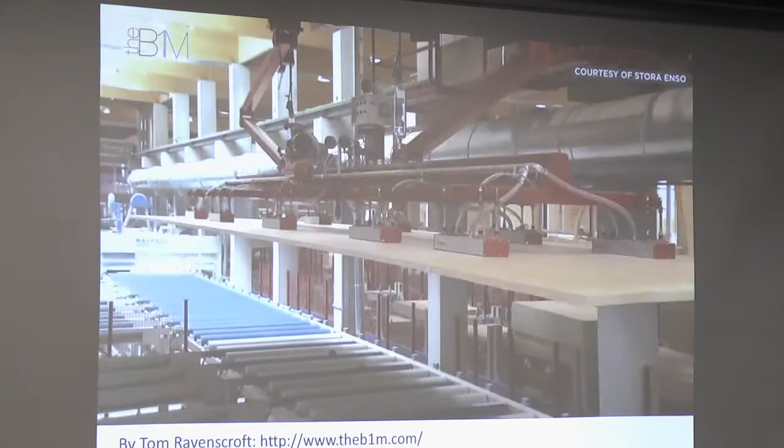Often referred to as super plywood, the material is constructed in a controlled factory environment from sustainably sourced timber. CLT is manufactured from spruce, although Scots pine, larch and Douglas fir can also be used. Once at the factory, the timber is planed and then kiln dried to reduce moisture content.

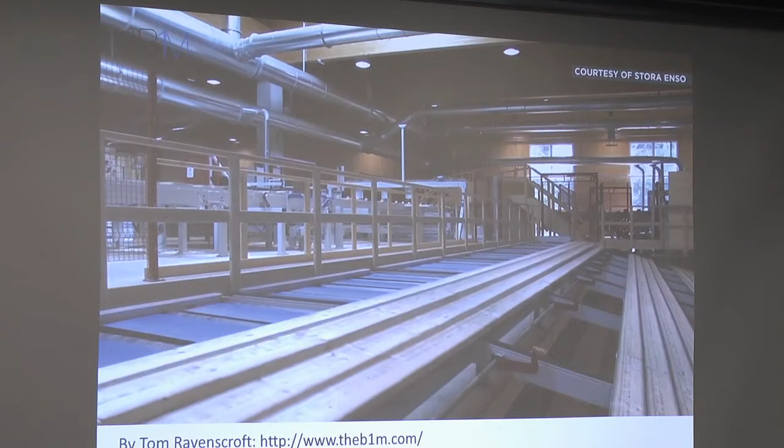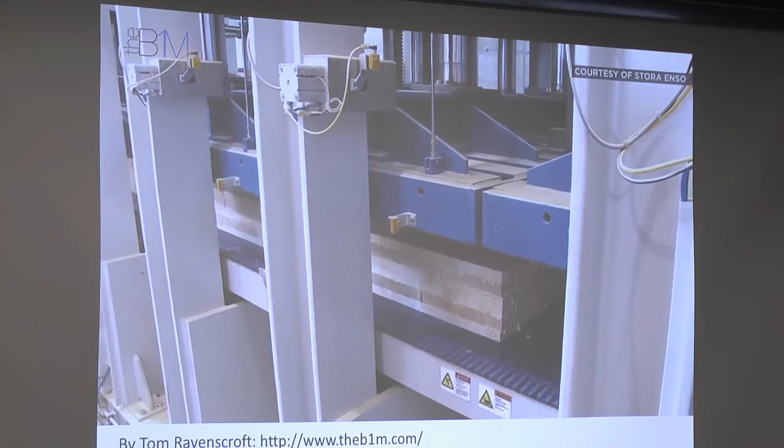The conditioned timber is then stacked into layers known as lamellas on top of one another. Each layer is placed at a 90-degree angle to the one beneath. These layers are then glued using a non-toxic adhesive and hydraulically pressed together to create the high-strength structural panels.

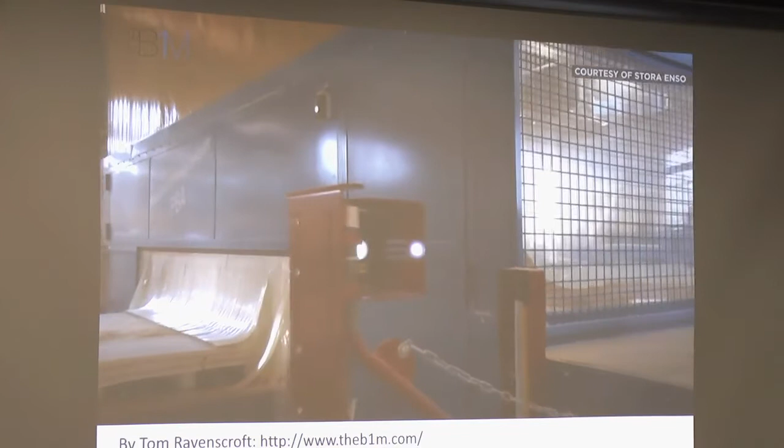Individual panels can in theory be any size. However, their width is limited by the size of the manufacturing machinery, which is usually around 11 feet or 3.5 metres wide. The length of the panel is only dictated by how it will be transported to site. While 45 feet or 13.5 metre lengths are typical for practical purposes, panels of up to 75 feet or 22 metres have been produced. Using state-of-the-art computer numerically controlled, or CNC, joinery machines, almost any shape of panel can be produced, meaning that door and window openings can be pre-cut in the factory. These off-site manufactured panels are then ready to be delivered to site.

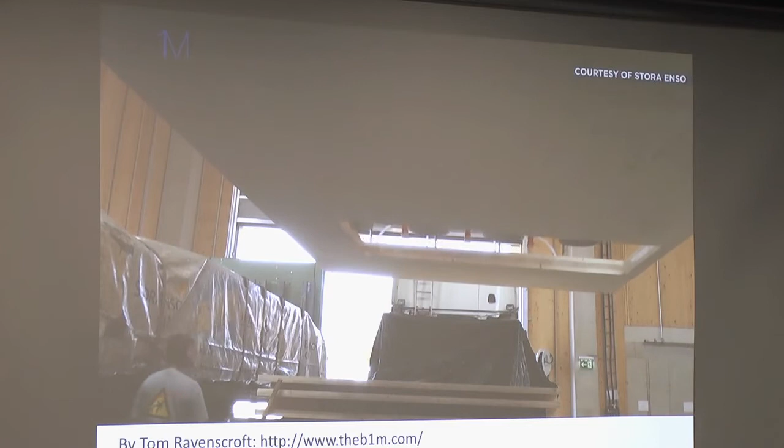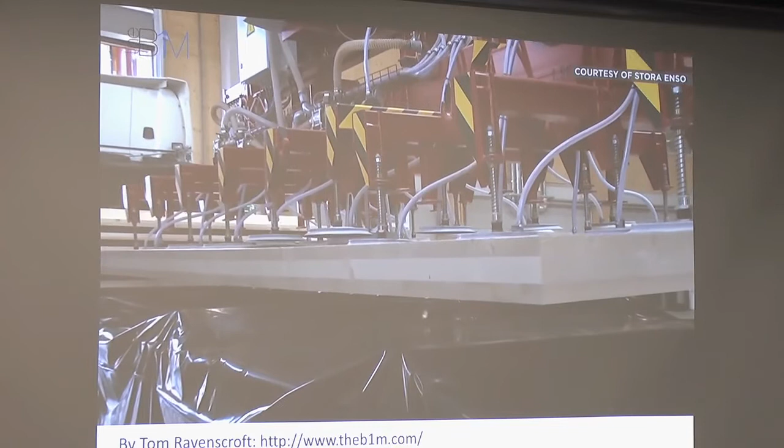Fabrication is currently limited to only a handful of factories in mainly alpine countries, such as Stora Enso's in Austria. While this may require the panels to be transported to site by road, the embodied energy added to the project is far outweighed by the carbon savings. Proponents of CLT claim that producing timber building components consumes only 50% of the energy required to produce concrete, and a mere 1% of that needed to produce steel.

Prefabricated panels can be delivered to site as they're needed, making this construction method ideal for schemes with limited on-site storage capacity. They are then lifted into place using pre-installed lifting straps and rapidly assembled, greatly reducing construction time and therefore cost. As the timber used is kiln dried, CLT should not shrink or warp when on site.

However, like most timber elements, CLT must be placed above the damp-proof level and will need protection when used on the external facade. CLT construction can also reduce the self-weight of a structure compared to concrete, potentially reducing groundwork costs. The construction process is also cleaner than traditional methods, with greatly reduced levels of dust. It is also quieter, a distinct advantage for projects built in urban areas.

While there are numerous benefits to CLT, some people are fearful of living or working in timber buildings. Some believe these structures have an inherent fire risk, particularly when rising to 10, 20 or 30 stories tall. Unlike unprotected steel, CLT can remain structurally stable when subjected to high temperatures. When exposed to fire, the outer layer of timber chars and forms a layer around the structural core, which can retain its load bearing capacity.

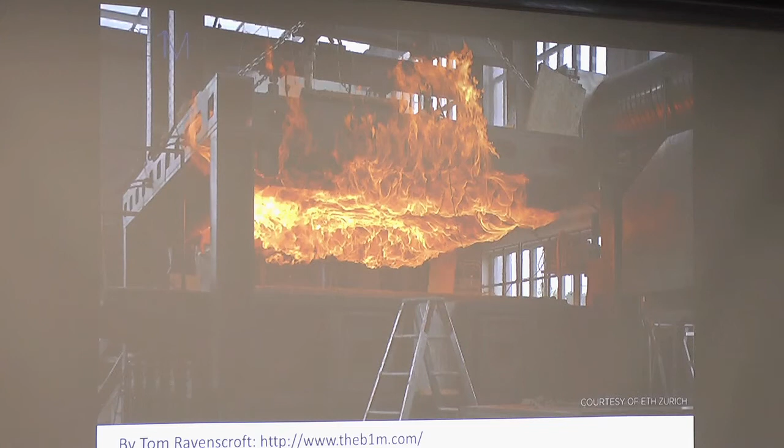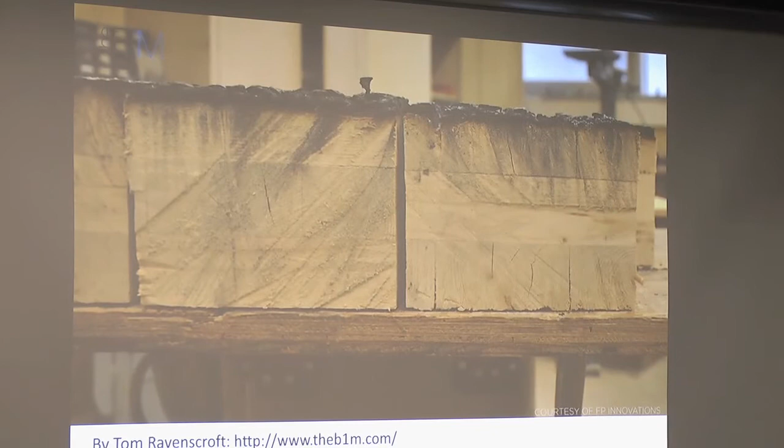CLT's inherent fire resistance allows it to comply with fire resistance classes, withstanding blazes for between 30 and 120 minutes, depending on its engineering and formation.

CLT uptake and use was initially driven by the material's sustainable credentials. However, in recent times, a resurgent construction market that is placing pressure on traditional materials, along with increased awareness, has bolstered adoption. While early CLT buildings were predominantly small, low-rise structures, the material is increasingly being considered for taller schemes. Since architect Waugh Thistleton built the first timber skyscraper, or plyscraper, in 2009, tall timber buildings have been planned around the world. In the past 5 years, towers of 30 metres, constructed from CLT, have risen in Australia, America and Europe.

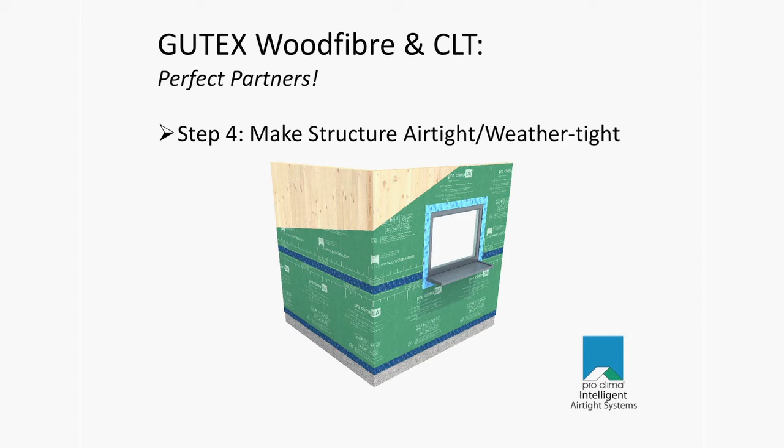This is one of Pro Clima's membranes, called DA. It's weather resistant, but it's also airtight and gives a degree of vapor control as well. That's wrapped around the CLT in this case, and then it's taped at the joints with a tape called Tescon Vana. So if the membrane wasn't used, it would simply be a matter of using a high performance tape on the butt joint of the CLT, such as a Tescon Vana tape you'll see later on.

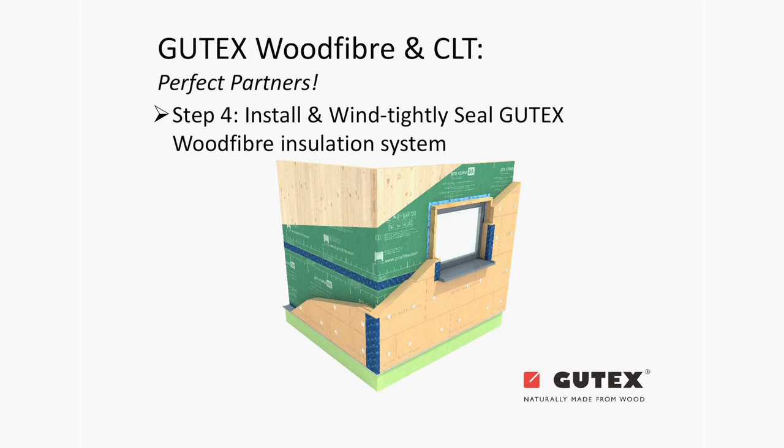Following that, the insulation is fitted. Here we see a single ply of Gutex multi-therm, for example. You can see this on the displays outside and in here as well. This is initially fitted with some temporary screws, and then the battens are fitted on the outside, followed by

the external cladding, which is timber clad or cement board or whatever that may be. You'll notice with the Gutex boards, they're tongue and grooved, interlocking, and watertight. The external Gutex boards are impregnated, so they're inherently very water resistant. The weak point would be at the butt joint of the board, wherever it corners or around windows. So at butt joints, it's important to prime the surface and then use a suitable high performance tape, such as the Tescon Vana we see here.

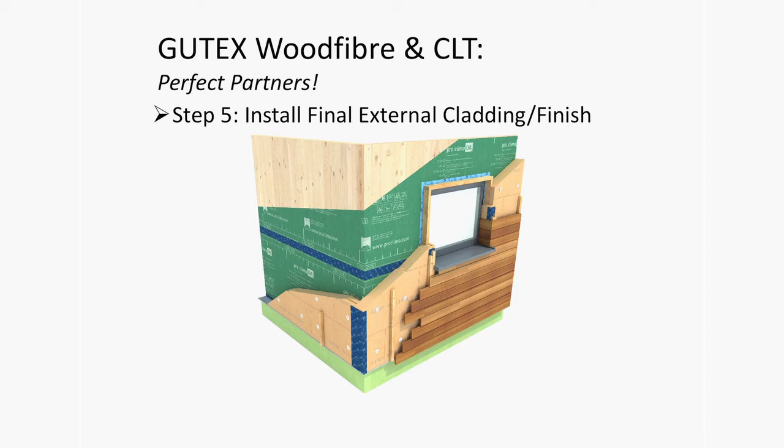Of course, you can apply a breather membrane on the outside of the wood fibre board for additional robustness and belt and braces. Or perhaps if you had an open jointed cladding and you wish to visually see a black finish between the open joint, you can use a membrane for that application. ProClima manufacture one called Solitex Fronta Quattro, which is a UV stable membrane, black in colour, so that when you have the open joint, you're not going to get degradation due to UV light.

In terms of projects, this is one of the first projects we've worked on involving CLT. The very first project was with Urban Architecture. I'm delighted to see Steve here from Urban Architecture, a project in Flinwell. But this project, the Woodland Trust headquarters in Grantham, we worked on with Will. It was the first CLT project we worked with Will on, and it's a BREEAM excellent building.

The walls utilised approximately 282 millimetres of Gutex in some locations. It's the first time I learned the term 'the bookend wall', and it stuck with me since, because that's where the thickest piece of Gutex was used. It was generally 182 millimetres, but there was the bookend wall that went up to 282 millimetres. So technically we had to come up with details to address the increased thickness and the fixation onto that point. So it stuck with me.

The building is very impressive. It has achieved a U value of 0.11, and it used a lot of the tapes and seals I referred to earlier on. Here we see it in actual application, where a combination of three Gutex boards were used. A board called Thermosafe Homogen, which is a relatively soft wood fibre board but very compressive resistant, and it helps you build up your bulk depth of insulation. And then that's covered by one of the impregnated Gutex boards, which Reiner will describe later on, called Gutex Ultratherm.

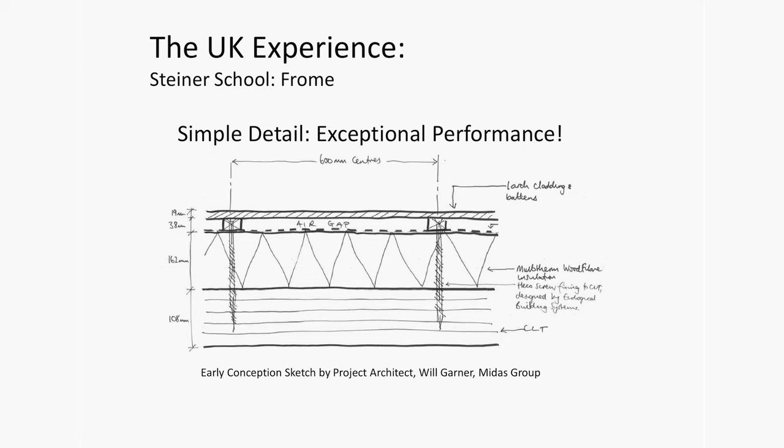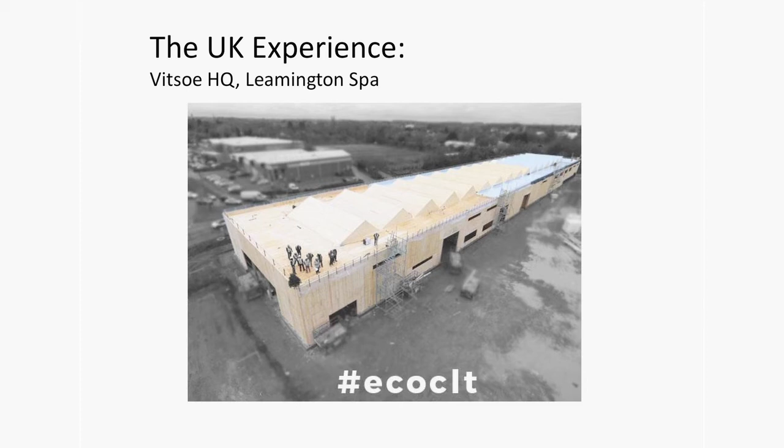This project is the Vitsoe headquarters, and Vitsoe manufacture bespoke furniture in Leamington Spa. This is on site at the moment.

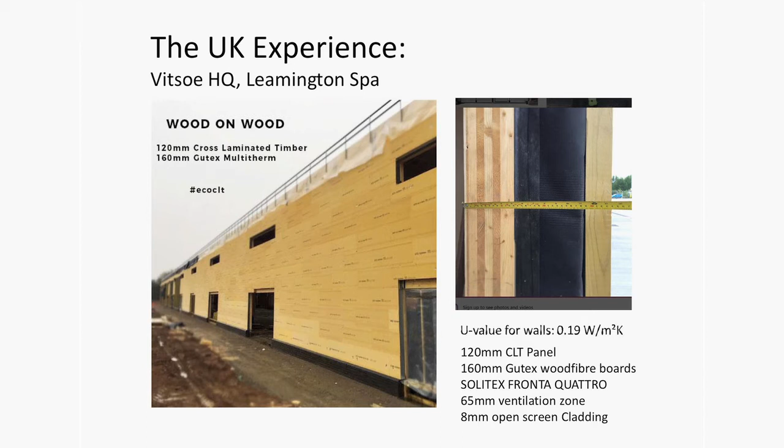It's a 120mm cross laminated timber wall with 160mm Gutex Multitherm in one single ply. Here we see it fastened to the wall temporarily before the battens are applied. The U value attained was 0.19 with 160mm of Multitherm on the outside. We had a 65mm thick batten followed by an external open joint cladding system.

In this project, for the CLT they didn't use an exterior membrane, they just taped the joints with a tape called Tescon Vana. So that was the airtightness layer, the CLT itself. It wasn't aiming, as far as I'm aware, for passive house levels of performance, and it hasn't been tested yet for airtightness either.

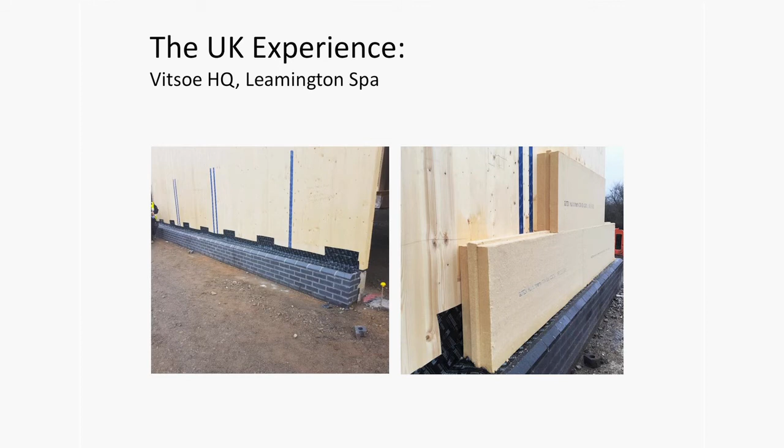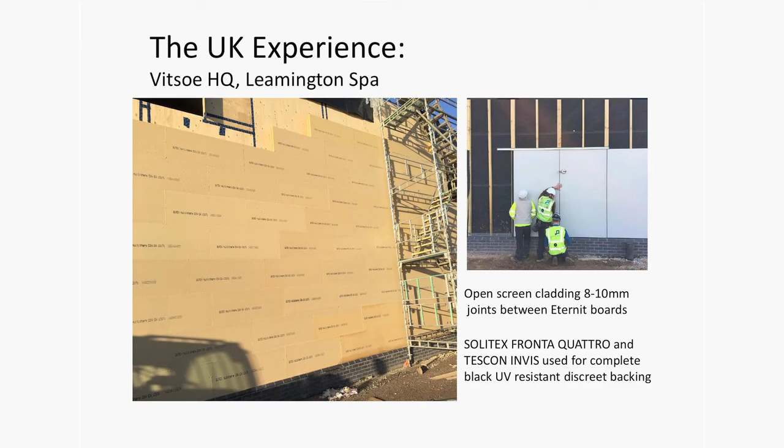And there you see it on site with the boards ready to be fitted. On the outside of this we'll have the Solitex Fronta Quattro membrane installed with the open jointed cladding for UV stability. This project is a private dwelling, and it'll be presented later on by Tectonics Architects.

It's a very interesting project in that it's a certified passive house, but it used quite a considerable depth of Gutex on the outside. It used 320mm of Gutex, which required quite long screws, and that's why I brought this with me, the real reason, because these half meter long Heco screws were used.

At the time I ran through the screw calculations for fixings, and I got to speak with Paul from Heco. He's very helpful in their technical office, and just to double check that it was actually okay. As an engineer I didn't doubt myself, but I wanted to speak to another engineer and run through the calculations to double check. So I can hand that around - that's the Heco screw.

This project attained 0.29 air changes per hour at 50 Pascal, and for a passive house you must get less than 0.6 air changes per hour at 50 Pascal, so it came well within that requirement, and the U value on the wall was 0.1.

Here we see the CLT with 3 layers of Gutex and 2 layers of Gutex Thermosafe Homogen, followed by a board called Gutex Ultratherm on the outside, a batten, and then a half meter screw going back to the CLT.

That's one of the benefits with CLT when you're using such long screws, because an issue we often come across is on a timber frame, you're looking for your 400 or 600 center stud that may be 44mm wide, and trying to get through that depth of insulation and hit that stud can be chancy enough. With CLT you've got a full uniform substrate, so you're never going to miss the point of connection, and there's no risk of splitting wood or timber. So it's really, really good.

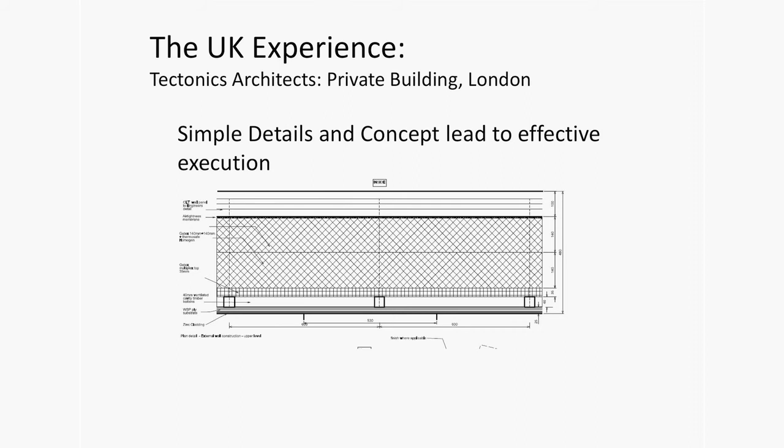In terms of the process with this project, we worked with Bernard Tulkins. A big issue was getting the material to site. The CLT was one thing, but it was a very restricted site, so getting the material to the site and making sure the people installing it were doing it correctly.

Bernard took on board some of our leading experts that we recommend for installing airtightness and installing Gutex, who installed it on this project: Roman Segura, and another fellow called Dave Broderick from Ireland. And I did the installation of the air barrier layer, the Proclima DA membrane, taped on overlaps with the Tescon tape.

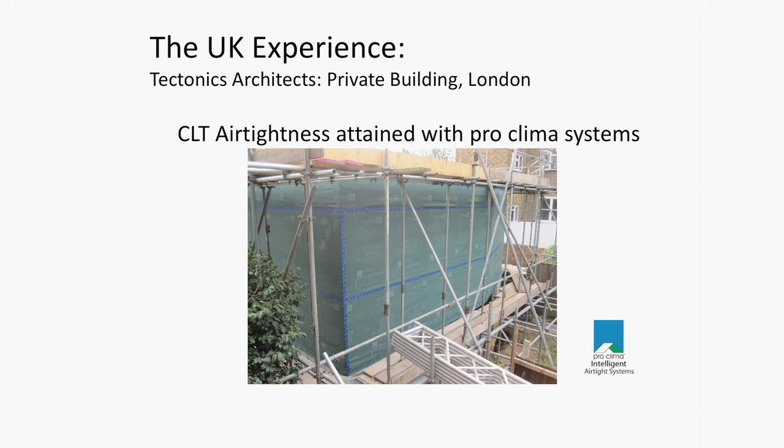This is the Heco screws that were used, and I'm not going to speak much about that because Paul is going to go into that in much more detail later on. But I know myself, working with the screws when I got training in Germany with Heco, it's incredible the difference if you have the wrong screw in terms of burnout of the motor on the drill, speed of application, and the number of screws you need.

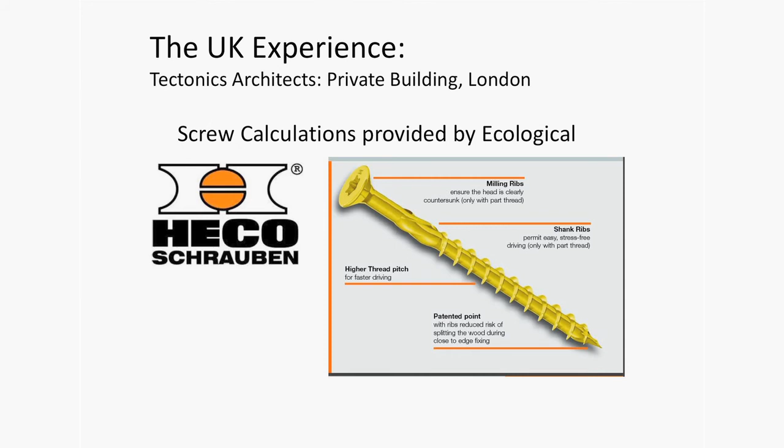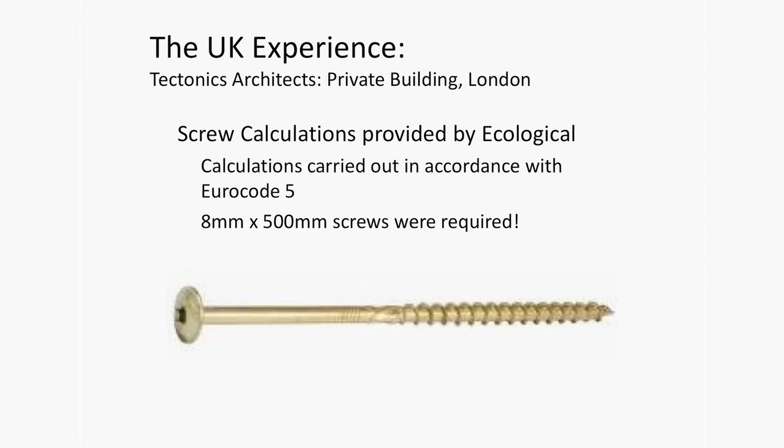Depending on the screw you use, it's a big factor to take into account. All calculations for screws in this project were carried out in accordance with Euro Code 5. There were 8mm by 500mm screws.

In terms of the application, here we see the installers working with it. For installing the screws, the principle, as will be covered later in much more detail, is to install what's called a suction screw, inserted at 90 degrees to the frame, followed by a screw called a shear screw to deal with the shear loading, especially when you've such a deep layer of insulation and the load of the cladding to bear in mind.

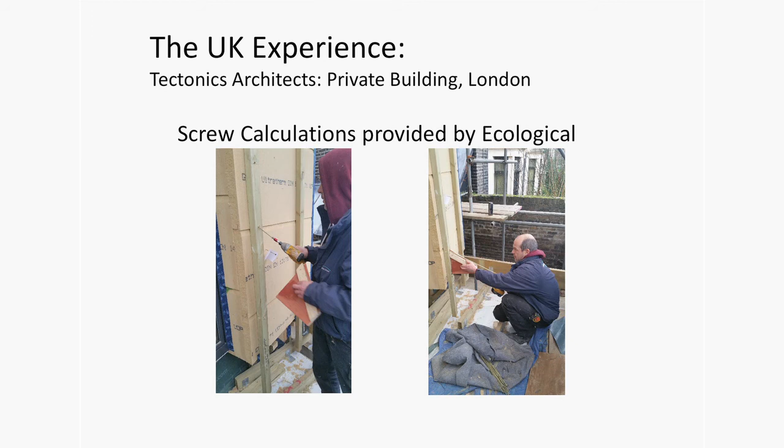This screw is inserted at 30 degrees, and this is a handy template you use just to get your initial impression. Insert the screw and then work away to your angle. That's fitted onto the batten to give you your angle, and then you fit it in. That's a Heco template, and that helps guide you to ensure you're inserting the screw at the right angle.

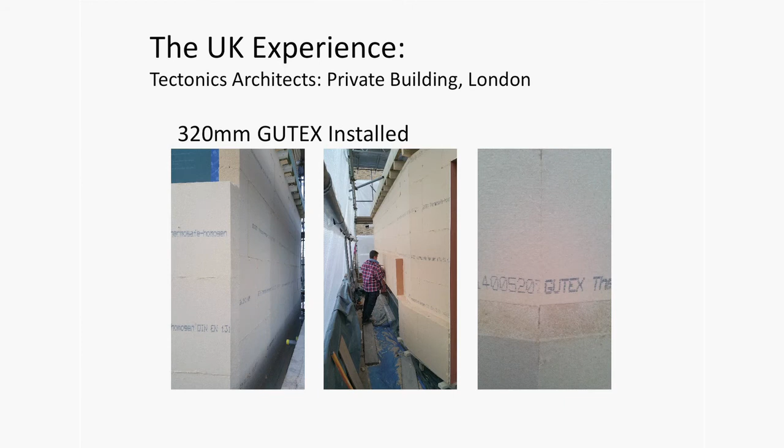There we see the boards being fitted on that project, and following that, the boards are made watertight. While the boards are inherently watertight at the tongue and groove joints, at the butt joints that's where you may have a weak point, and that's primed again and taped at the joint. So there's no membrane used externally on this project, and then you had the external cladding on the outside of that.

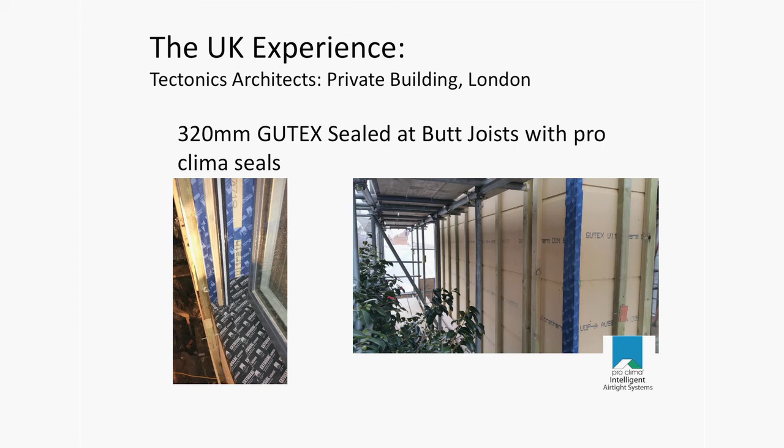Key points were the flashings around sills and door thresholds. These were very important. And then we see the beautiful inside of this project later on—Bernard will go through this in much more detail later. That project was supplied by Urban CLT.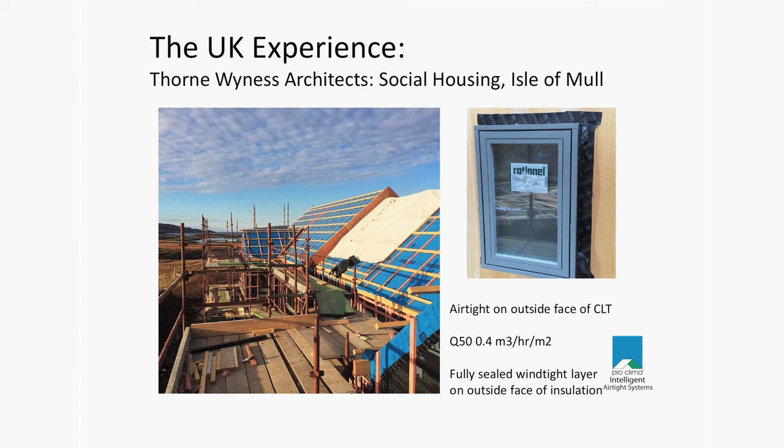On this particular project, they actually just taped directly to the CLT, taping overlaps and joints in the CLT with the Tescon tape for airtightness. Again, the windows were sealed back to the CLT with butyl tape, the Extoseal Encors. It achieved a Q50 of 0.4 cubic meters per square meter, so a very impressive level of airtightness on that project.

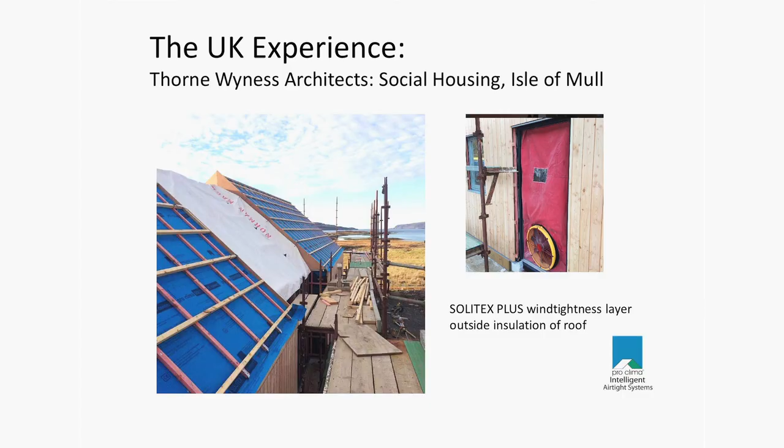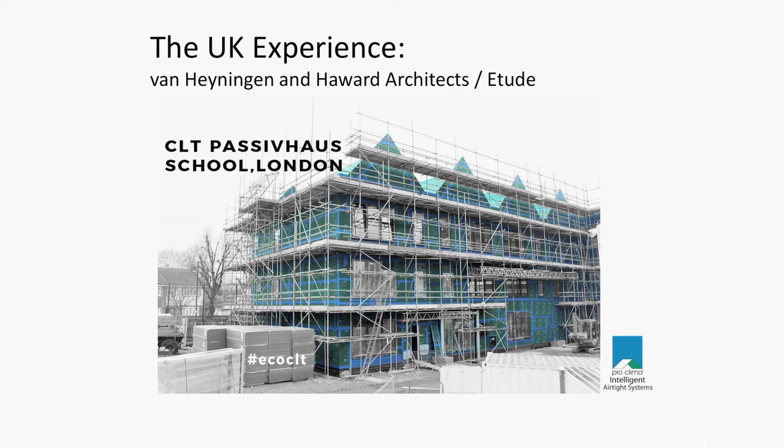Finally, this is a CLT Passive House school here in London by van Heyningen and Haward Architects. On this project, they again employed an exterior airtightness layer on the outside of the CLT because they're aiming for Passive House certification and want to ensure they're actually going to hit their target.

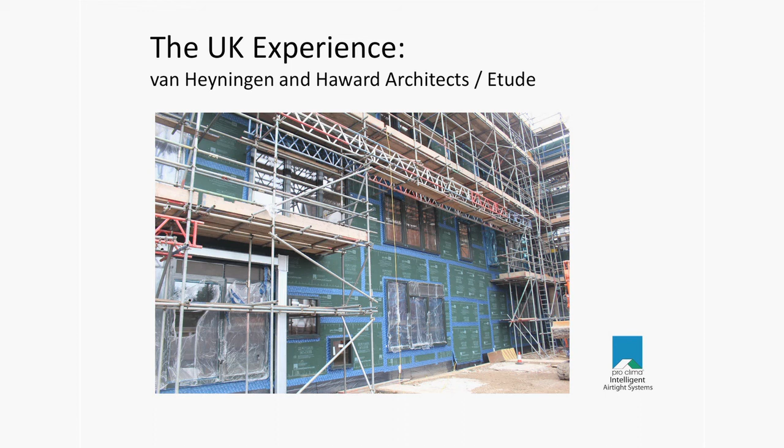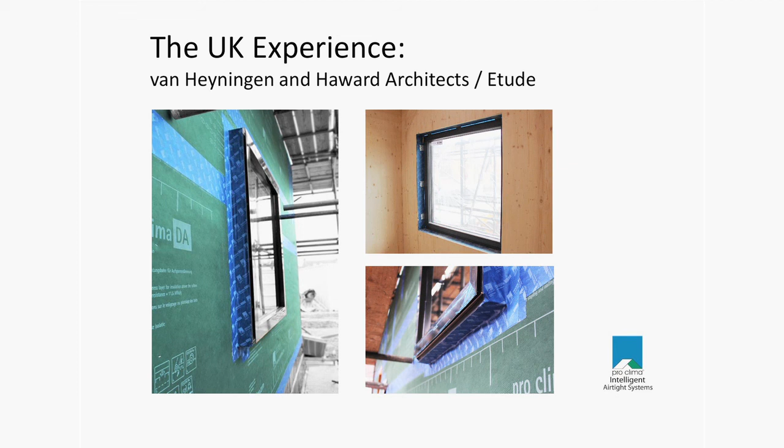On the inside, we see the exposed CLT in all its beauty, and key junctions and details around window openings were detailed with proprietary tapes and seals.

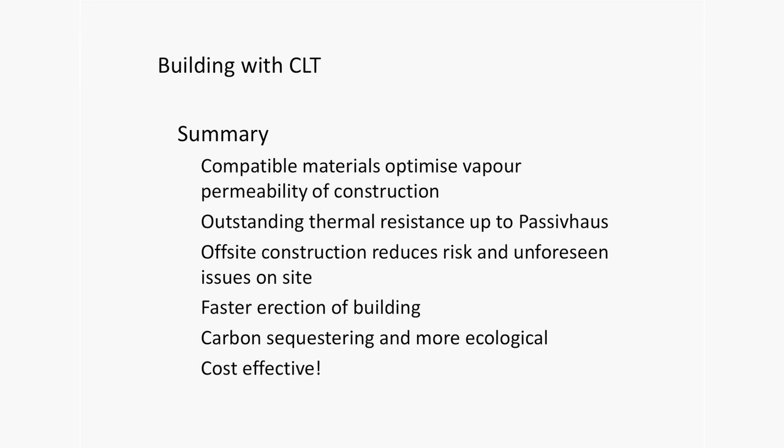I think I'm just about on time, Penny, so I'm coming to my summary. In terms of CLT and using wood fibre insulation, they're very compatible materials—it's a perfect match, and it optimises the overall breathability of the structure. It offers outstanding thermal performance, and wood fibre has been used regularly on these projects now to achieve the ultimate in efficiency, in passive house levels of performance. It's off-site construction, which reduces the risk of unforeseen issues, and faster erection of the building reduces costs. It's a carbon sequestering material, much more ecological and cost effective as well.

But until then, I'll use wood. If not wood, then what? And that's what Peter says. I think it's a very good summary of why we use wood and why we should use more wood in construction.